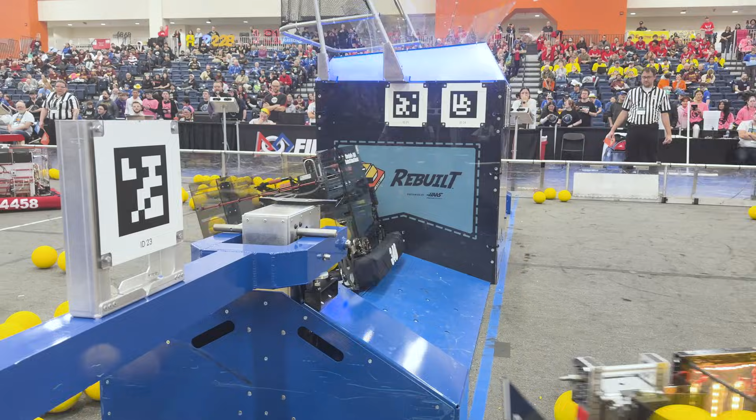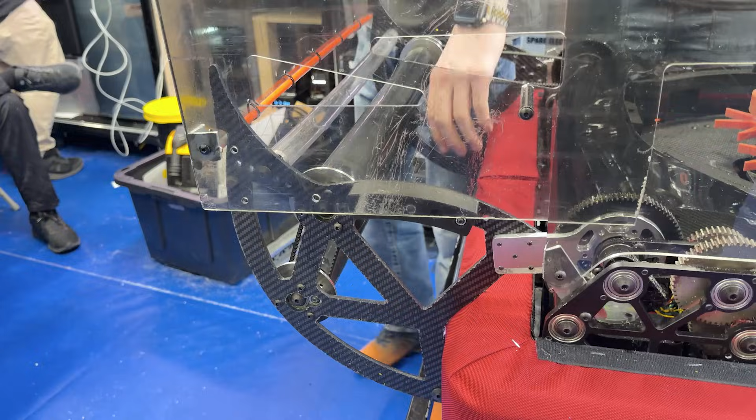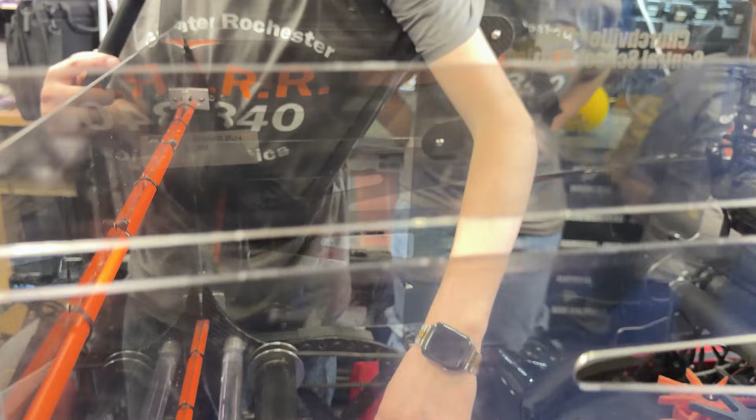First up, we have Jack talking about the back of the robot. Hi, so the back of our robot consists of the intake, hopper, and spindexer. Our intake has a 50-to-1 gear ratio for the pivot and a 3-to-1 gear ratio for the rollers. The intake pushes out the robot with the front face of this curve here on this rod right here. You can see a little bit of the lines where it's constantly hitting. That's because we use it so much that it just wears a path and scratches it.

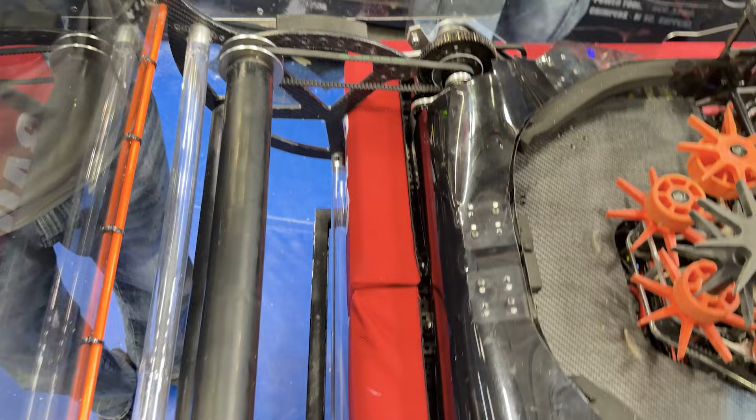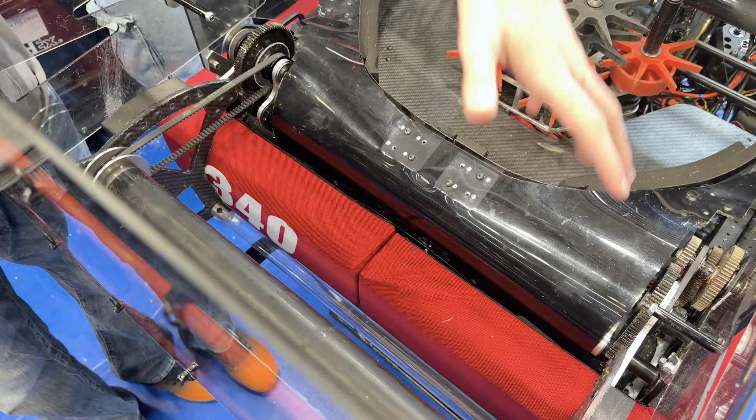Our rollers have a lot of pinch against the bottom roller here and our bumpers, so we can get a nice spring out of the balls and it launches into the robot. Another part of it launching into the robot more is our gear ratio. We have a high speed, low torque gear ratio because we wanted the balls to go into the robot more versus just gathering here in this part of the robot. The intake helps push the hopper back with these two standoffs and the constant force springs on both sides.

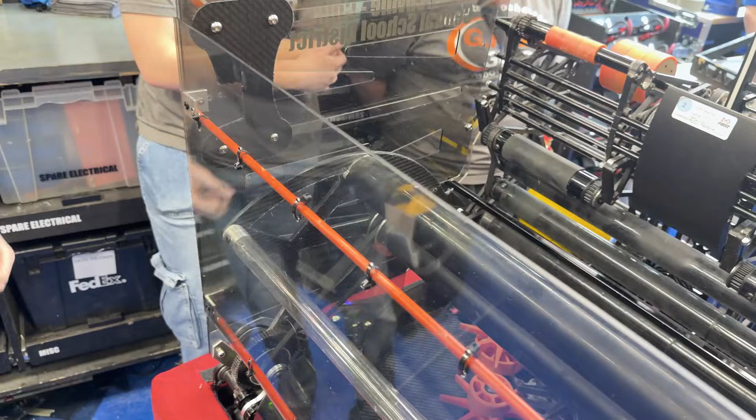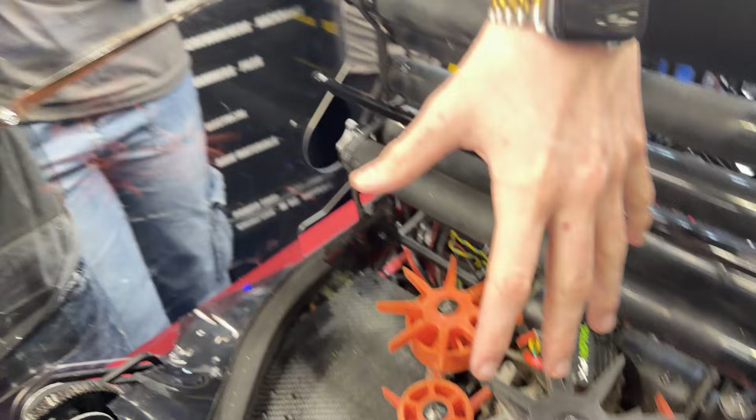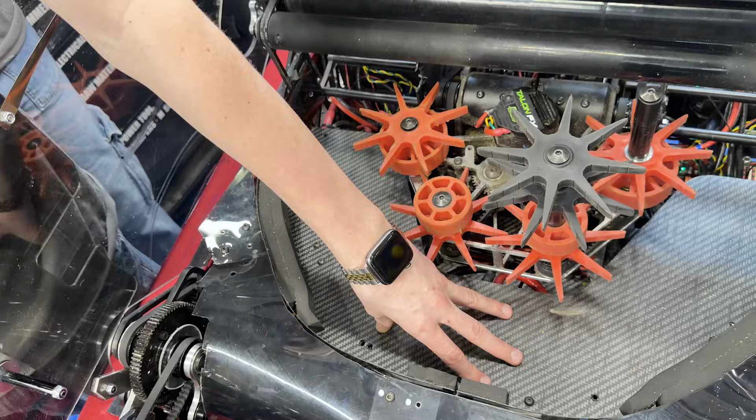On top of that, the spindexer has these wheels here to help agitate the balls that are up here, because we found that a lot of them were just dead zone and they were just getting clogged up in this area and this area here. So we added this guy to kind of agitate them more. And we found the star wheels, the 3-inch compliant and 2-inch compliant wheels, help the balls fall into the spindexer floor more. So that way they can contain more balls, and so they're not all jamming in at the last second to get fed into the uptake.

All right, awesome. Could you guys take me through how you choose your roller ratio? So at first we had a high torque, low speed gear ratio, but the balls were just gathering here, and they were just getting stuck and jamming. And what always helped solve that was a jitter function that we had when we shoot. It helps put them back more, and also a higher gear ratio with a low torque helps put them into the hopper more.

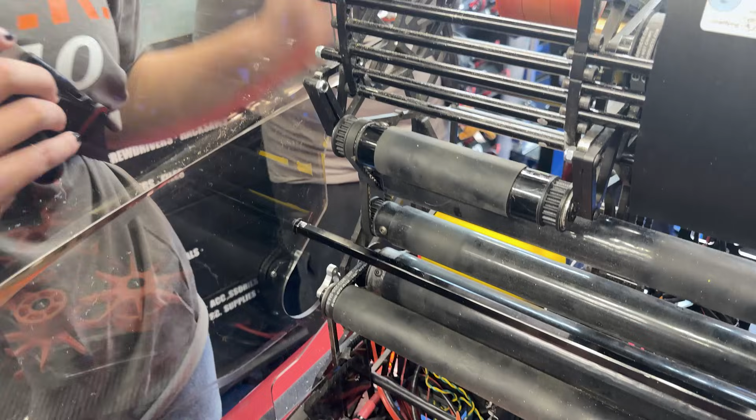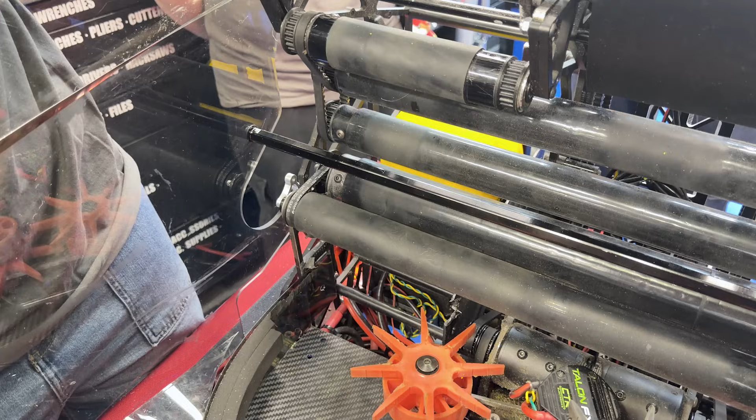All right, next up we have Ariel talking about our Uptake and shooter. So with our Uptake, our main part is these polycarb tubing with silicone covers on them. On each tubing end, we have these 3D printed pulley and plug designs that allow us to connect them through 45 tooth belts. And then our frontmost roller connects an X60 Kraken to it with a 125 tooth belt. And on the back, we have these Delrin rods that allow a lightweight backing plate and provide compression.

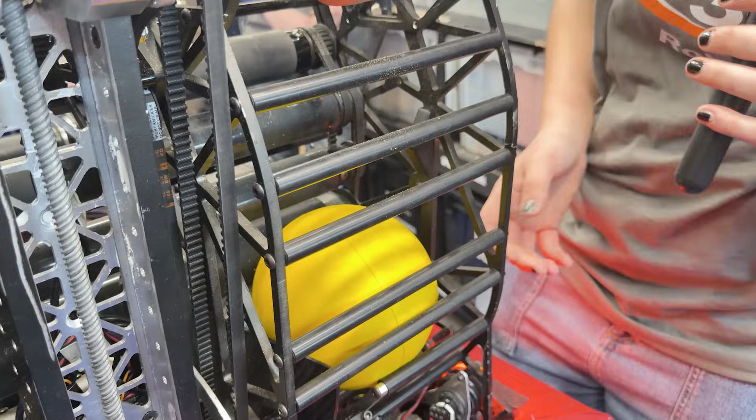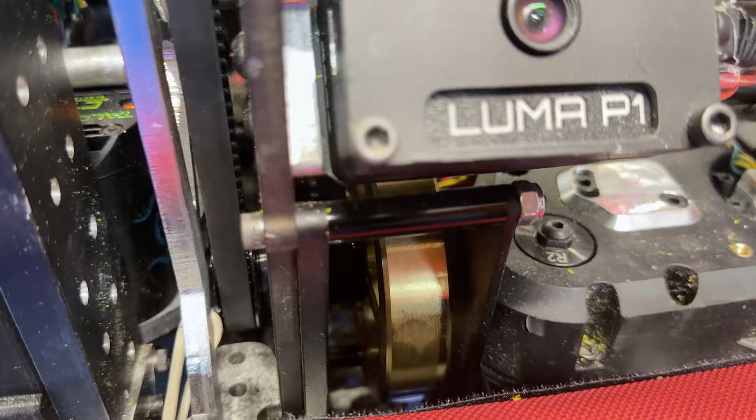And then with our shooter, we have these brass flywheels at the bottom that put kinetic energy into each piece to keep it moving up through the uptake. And then we have an adjustable shooter hood. Thank you, Ariel. Next up, we're going to go to Ashley with our climber and design process.

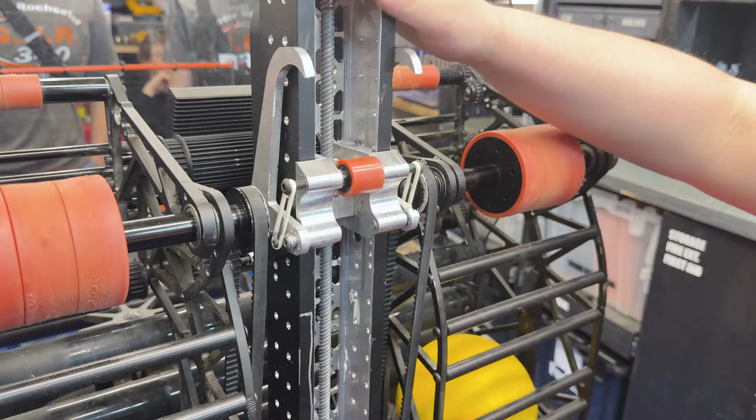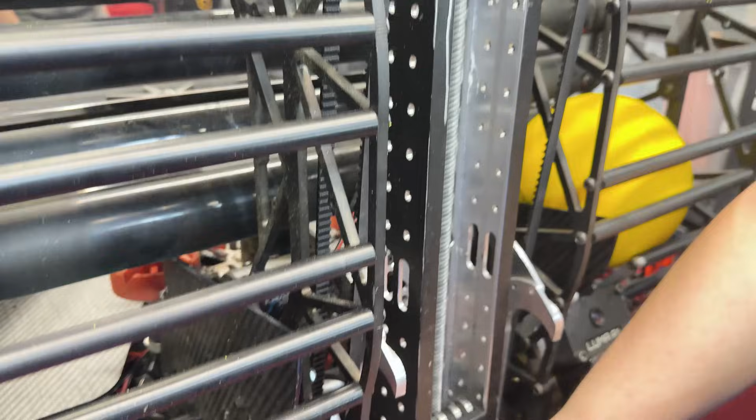All right, for our climber, we decided on the lead screw system because it was both compact and lighter than, say, an elevator. Our tubing is 2x3 tubing, and the back of it was pocketed on our Haas, while the front was manually machined on our Bridgeport. Down here, we have a servo from our sponsor, Rev, and on it there's two cams connected with a guide that comes down, and it kind of rides up the pole. But when that comes down, it brings out these passive hooks.

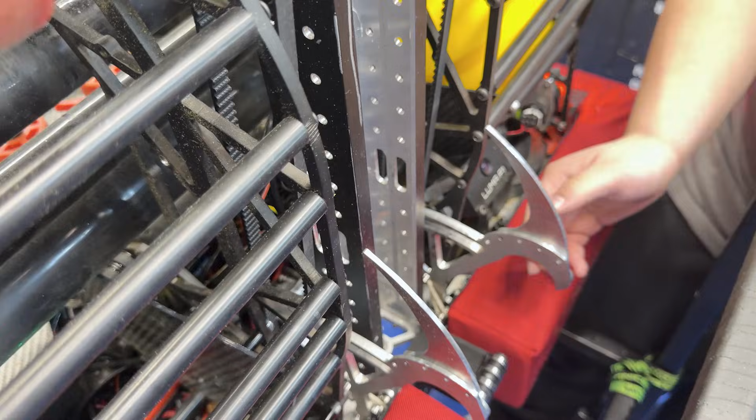Which are used to grab onto the climber when we climb to L3. And on each of these hooks, we have a fin, which we're able to take on and off, and we decided to do it that way so that if we needed to iterate or change the geometry at all to go around the pulleys in the back, it'd be really easy to do so.

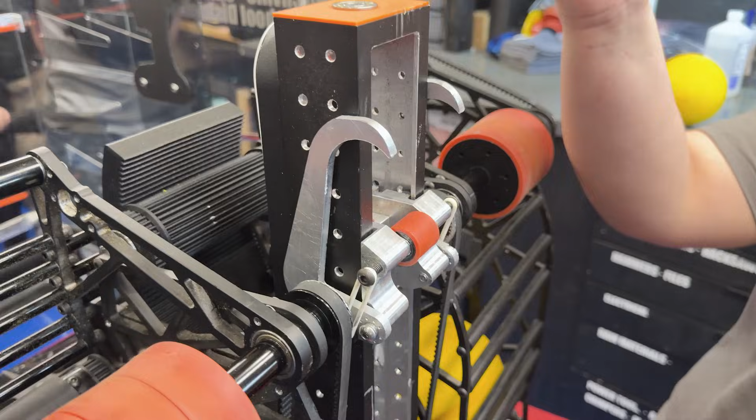Up here is our top climbers, and they're spring-loaded with castration bands. And there's a cam on the bottom of it made of TPU, which keeps them in a back position, but when they move up, they pop out and hook onto the hook. And then, do you want to show the L3? And that's our climber design.

We're gonna move on to the design of the robot as a whole. Each subsystem was designed based on another one, so as to fit around each other. The shooters, for example: we decided on our twin shooters to fit the climber in the middle, because we knew we wanted the climber to be in the middle to keep it balanced when we climb. So we decided to put our twin shooters on each side of it.

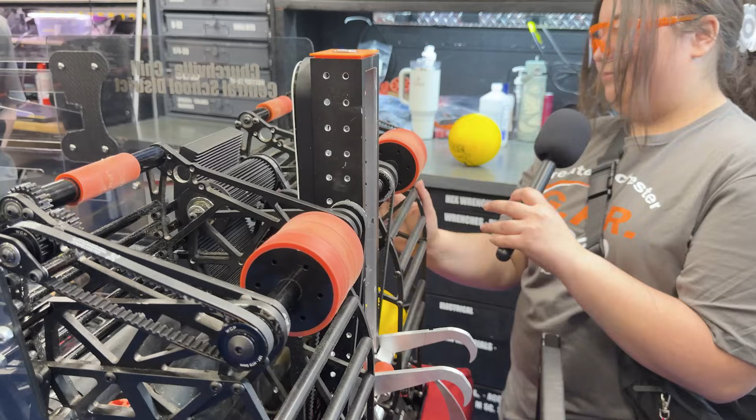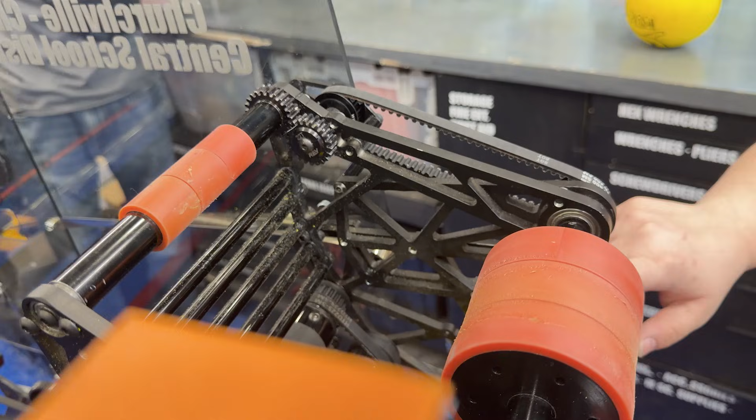And on each shooter, something we did differently this year from past years: instead of making one large plate for our shooter and uptake, we decided on multiple smaller plates. That way, if we needed to iterate or change our design, it would be really easy to just swap out and do that. Which then brings us to our spindexer on the bottom.

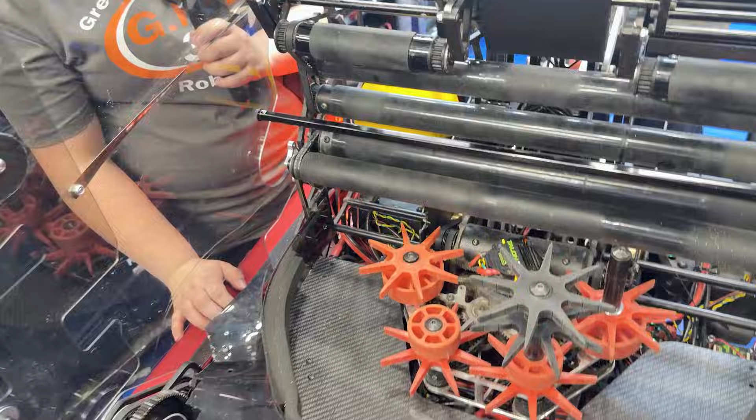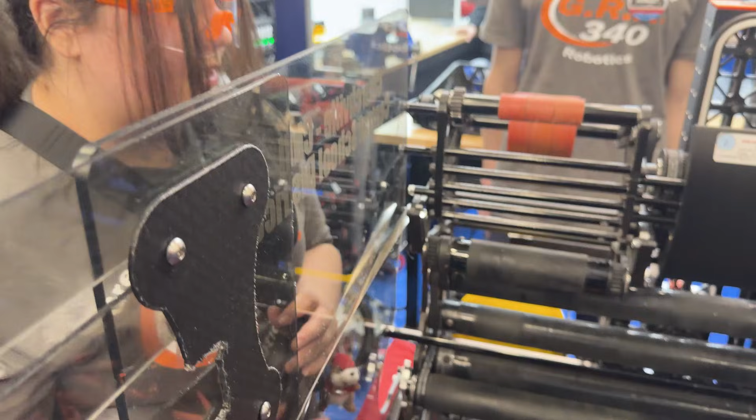We've iterated with many different designs. We've tried belts, we've tried pulleys, we've tried rollers, and we weren't satisfied with any of them, but when we came across this design, we really liked it because it brought the balls to each side of our uptake. We didn't have a need for the balls to go towards the middle anyways, and that kind of just kept them to each side of the robot, and that was really nice.

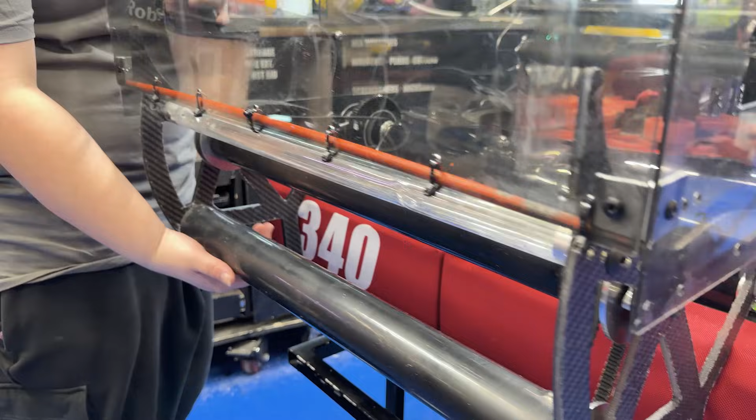All right, awesome. Could you take me a little bit through your intake iteration process as well? Yeah, so the intake iteration process, we've been through a lot of them. We first wanted a 4-bar intake, but it didn't really work out for us. So we've been playing with designs all season basically until right up before this competition, until we found this one design that worked out really well, and it's just a slap down intake. All right, thank you, Ashley. Next up, we're gonna go to Caleb to talk about software.

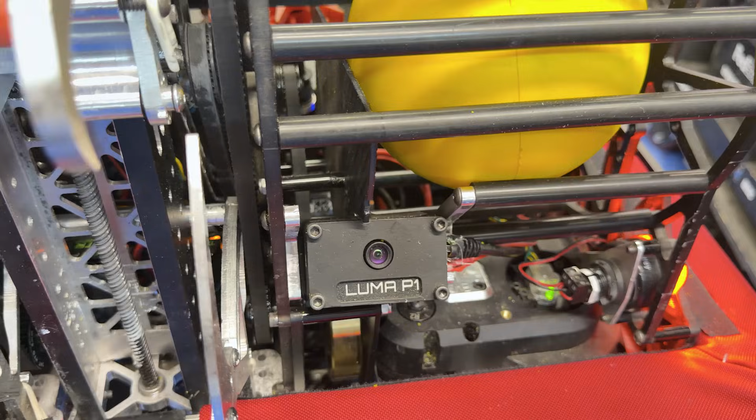So for our software this year, we have our basic stuff, but this year we actually got a new camera, a Luma camera, which works pretty well, and we are grateful to have our sponsors take care of that for us. And we found that the one camera worked pretty great for our vision and finding our location on the field using AprilTags, and we use that for our shooting, and it also allows us to shoot on the move so that we can have a more dynamic strategy.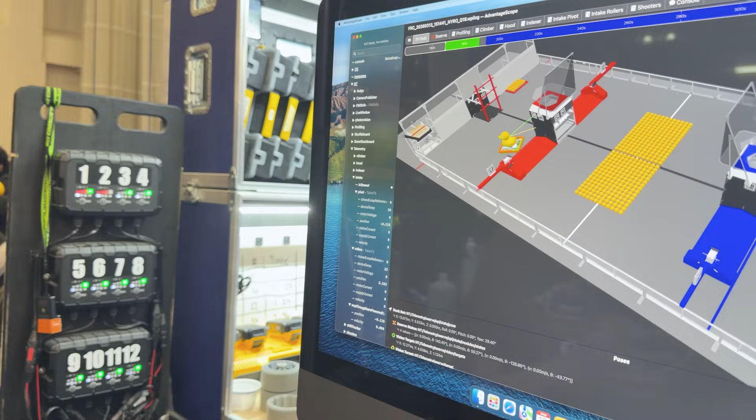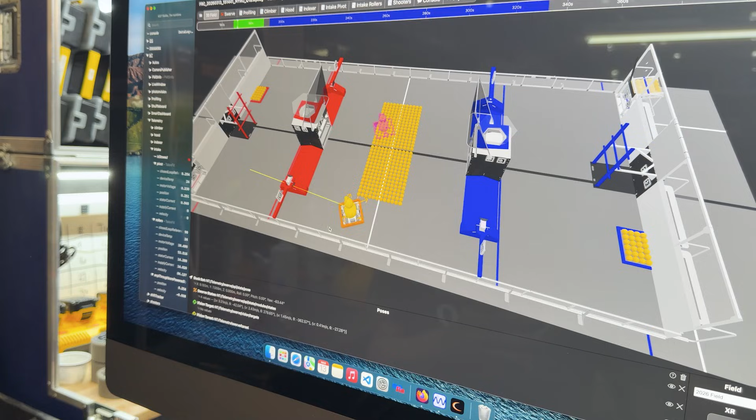We also, to have our dynamic strategy, have a new iterative, custom-built auto solver. So in our field, we have our robot, and it is using the April tags, and it also has a custom solver that we built so that it can find its path automatically. So if we play, it's going to its next target position, and it navigates around obstacles. So there, it's navigating over here, it finds it has to go here and then come over. And that allows us to do the autos really easily while also making them adaptive to any kind of bumps or pickups and not be on a time schedule.

Thank you to Team 340 for allowing me the time to interview them today. We wish them the best of luck at the Finger Lakes competition.